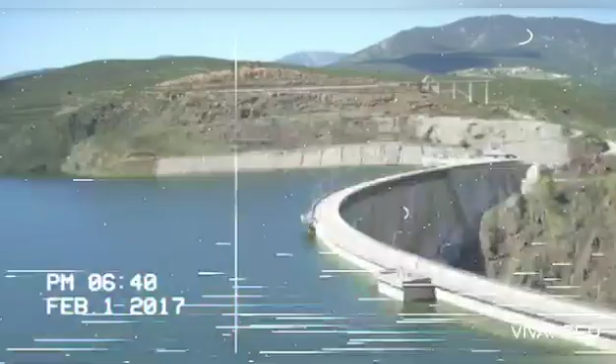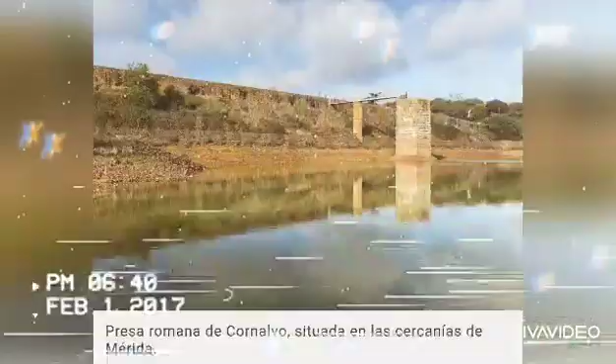If we go back to the different evolutionary stages of civilization, this dependence has been increasing. As a hunter, man used water to quench his thirst, and it also provided him with suitable hunting grounds where to hunt his prey. When he became a shepherd, he required water for himself and his cattle.

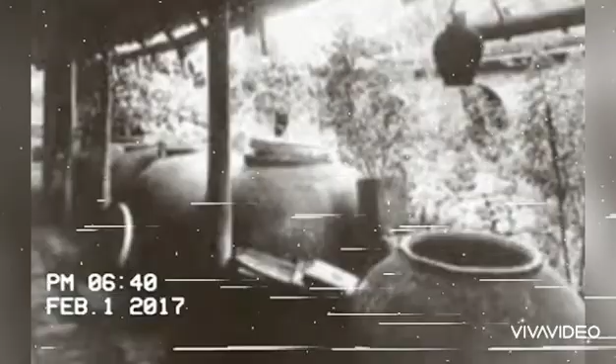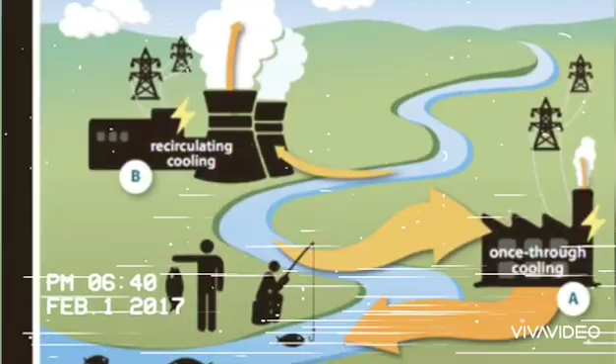When he became a farmer, he used water to warrant the collection of his crops and increase their production. If we talk about industrial development, water provides man with the moving energy that replaces the muscular one, reaching power never achieved.

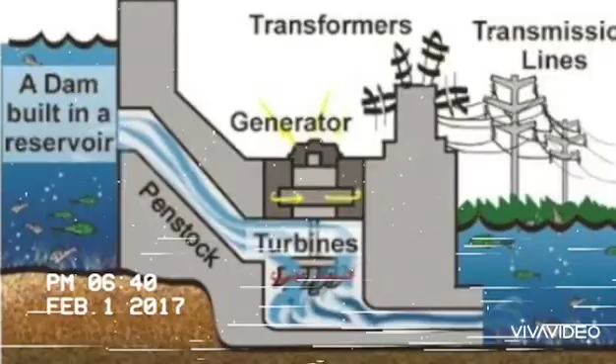Dams are large hydraulic structures that allow water to be stored or returned for use in activities such as irrigation, human consumption, and the generation of electricity, among others. They also serve to control floods, since they prevent the water from the mountains from going down to communities that are located on flat lands and close to rivers.

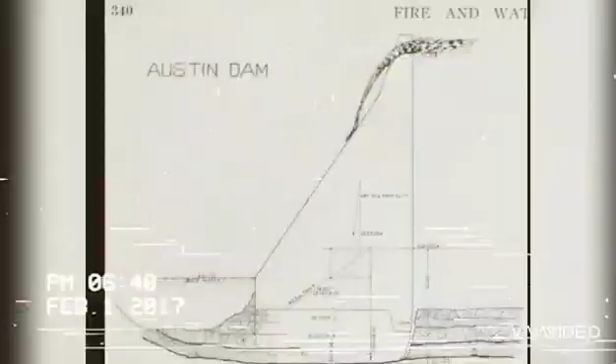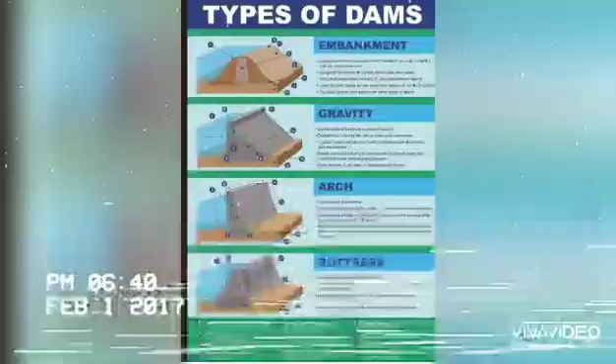Before we change the subject, it's very important and also interesting that we know a little about the history of these complex structures, for the human race as well as for their construction. Water, as a natural phenomenon, is discontinuous. There are times when currents increase, causing floods in certain lands and ending everything in their path.

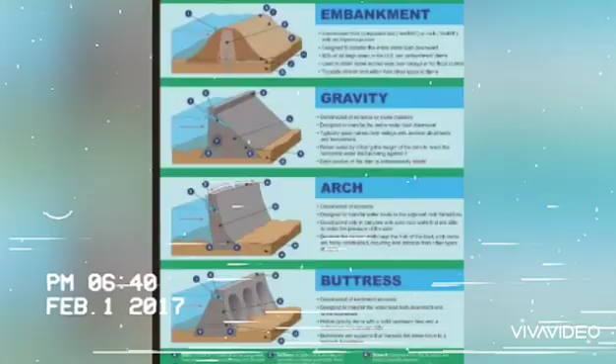On the other hand, there are times when rivers dry up, causing all those who make use of them to suffer in consequence. For this reason, to talk about the history, man stored water by creating reservoirs; for this, he created dams in the river channels.

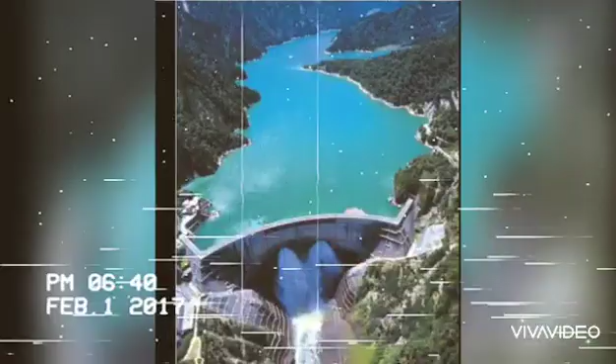Dams have rules from an operating policy, which is defined specifically for each dam, mainly based on the volumes of water that can be stored and supplied. This policy indicates the conditions that must be met so that during the rainy season the dams retain or release water to the lowlands without causing damage to towns or cultivation areas.

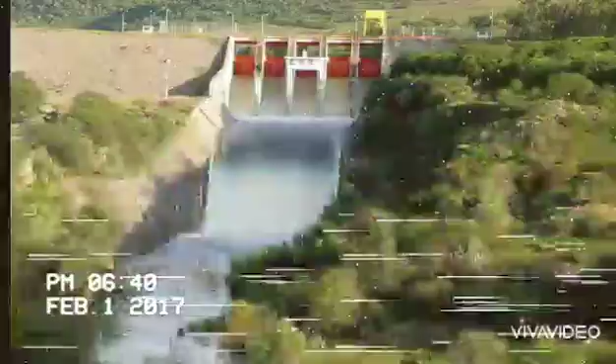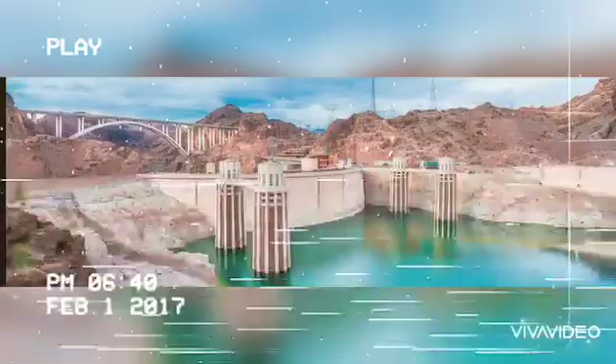This explanation was only something very short compared to all the information that we can know about this subject. I invite you to learn more about this subject that, in addition to being magnificent, should interest us all and future generations.